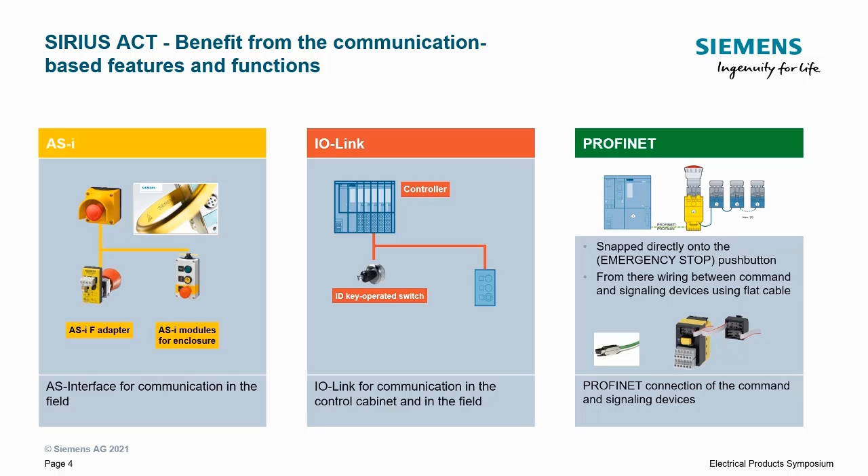So moving on to the communication options that we have available with SIRIUS Act. In addition to standard wiring, we have options for AS-i, IO-Link, and of course Profinet as well. With AS-i, we offer modules that go inside the enclosure. You can order these as standalone items, but these can also be put inside the enclosure, and you can also select them on our SIRIUS Act configuration tool when building up enclosures. We also offer AS-i F adapters on the left hand side that you can see, and then you would put an e-stop onto this with a holder, and that would clip onto the device that you can see.

With IO-Link, we have the modules that go into the enclosure. Again, these can be ordered as a standalone item, but also they can be put inside enclosures, and again they can be selected on the SIRIUS Act configuration tool when you're building up your unique enclosures. We also have a couple of modules over IO-Link for use with the ID key. This is a 4-position RFID key switch, and for each key you choose a different level of access you want that key to have, and it's possible to have a maximum of 50 white keys on this device.

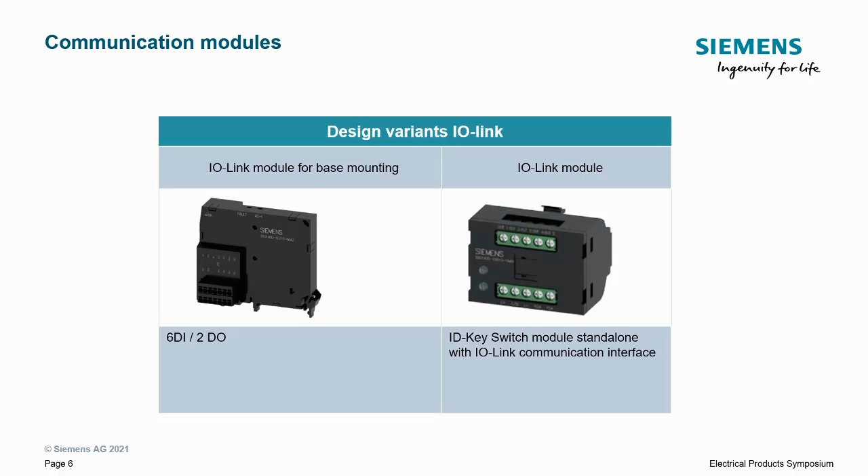So the main topic today is SIRIUS Act with Profinet. So what is SIRIUS Act with Profinet? It's a solution that's a different way of wiring up your commanding and signaling devices. It's a unique innovation from Siemens, enabling you to connect these devices over Profinet and have visibility in TIA Portal. Primarily, it's designed to save time when wiring up your panels and automation stations. It should reduce the chance of mistakes occurring, which can obviously sometimes happen when installing devices using the standard method.

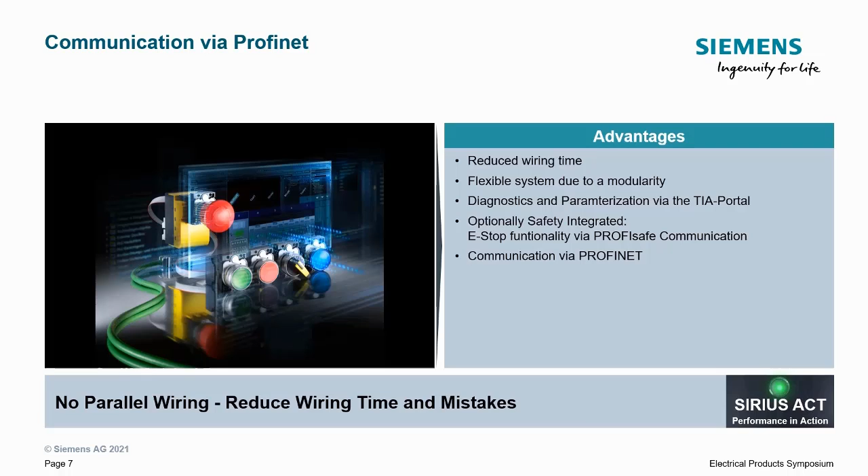And it's integrated into TIA Portal, so you get information back if there are any errors with any of the devices on the setup. And what we're looking at here is how we're moving forward, and how the EP team and the products that we offer are moving into this digital world.

Traditionally, when we talk to a customer about an automation system, normally we see something like we've got here on the left as an example. We see a PLC, it could be a Siemens PLC. We see devices connected directly to the PLC via hardwiring. And then we have some input and output systems. So this could be, for example, a Siemens ET200, connecting all the devices, and these tend to be hardwired, so not over a bus system. So this way the PLC receives the basic information it needs for operating inputs and outputs, etc. But as you can see, the majority of the items are hardwired. With the diagnostics, you'll get some diagnostics information, but it will be from the higher level.

What we are hearing constantly is about Industry 4.0, the cloud, etc. And at today's symposium, we're showing what we have available to help customers move forward with better future-proof solutions, helping the customer make required changes quicker by getting feedback from the whole system, not just certain elements.

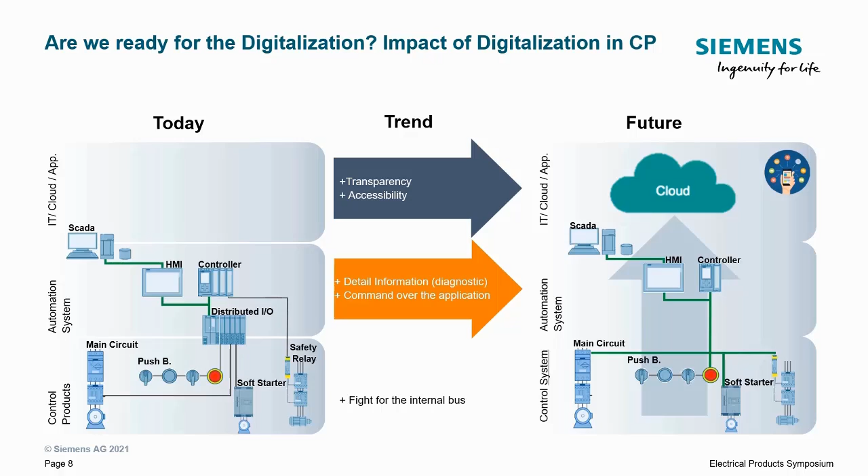So what do we offer for this solution? There are two versions available. We have the standard version and the safety version. Both versions allow you to daisy chain up to 20 additional items from the gateway. The total length between the first and the last items can't exceed 10 meters, and the maximum distance between each module is 1 meter.

The safety version has the functionality of an e-stop and it can achieve a SIL rating of 3. The safety version also requires a fail-safe PLC. For the standard version, you can mount a standard push button on the gateway. Please note that it isn't possible to put an e-stop on the standard version or on any of the terminal modules further down the line.

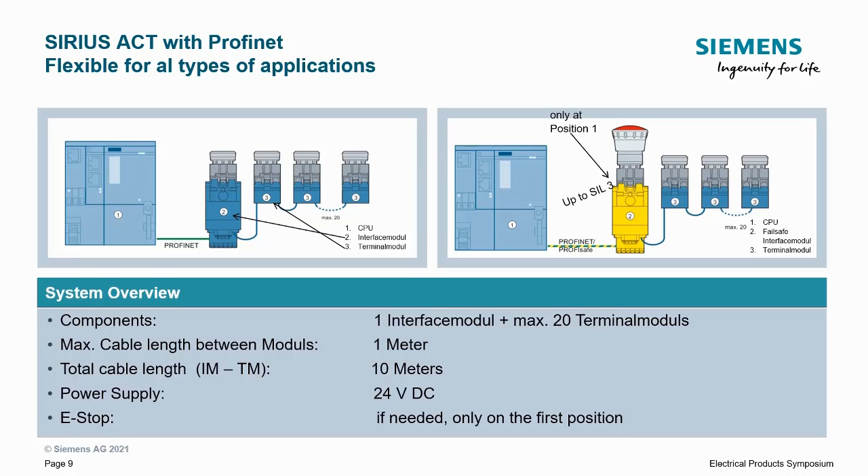When using SIRIUS ACT with Profinet, we're using standard push buttons and standard holders. The only thing that you are changing is the contacts on the back. So instead of using standard contact blocks, we're using either terminal modules or interface modules. As we can see, we have 3 interface modules. So 2 of them are standard versions, and then 1 safety version.

The safety one and one of the standard versions also give you some additional I/O. They have 4 digital inputs, 1 digital output, and 1 analog input. So they are for devices that can't go on the standard terminal modules. So we've got the 4 digital inputs for something like the joystick. We have the analog input for something like the potentiometer, and then the 1 digital output for something like the acoustic sounder or buzzer. The additional I/O also allows you to put some additional sensors close to the interface module. This enables you to send signals to the PLC from the I/O.

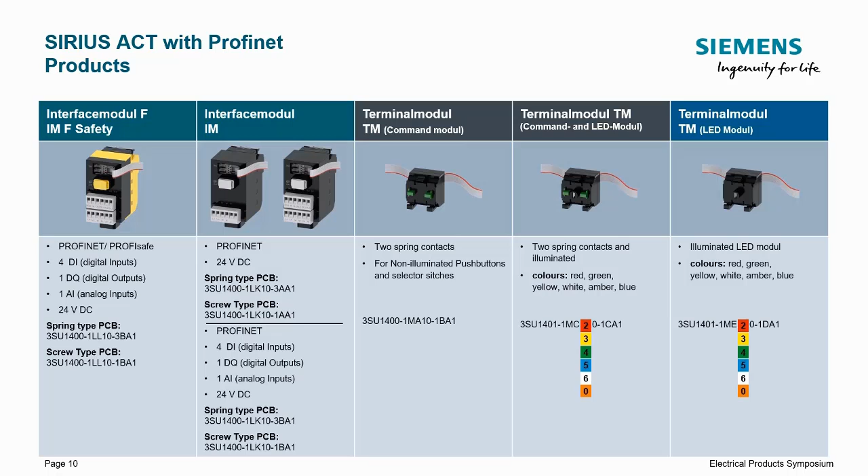So there are 3 terminal modules that we offer. We offer command only, command and LED, with a number of LED colors, and then LED only, again with a number of different colors available. Additionally, we sell a few accessories, including an EEPROM, which you can use on the standard interface modules or as a spare for the safety version.

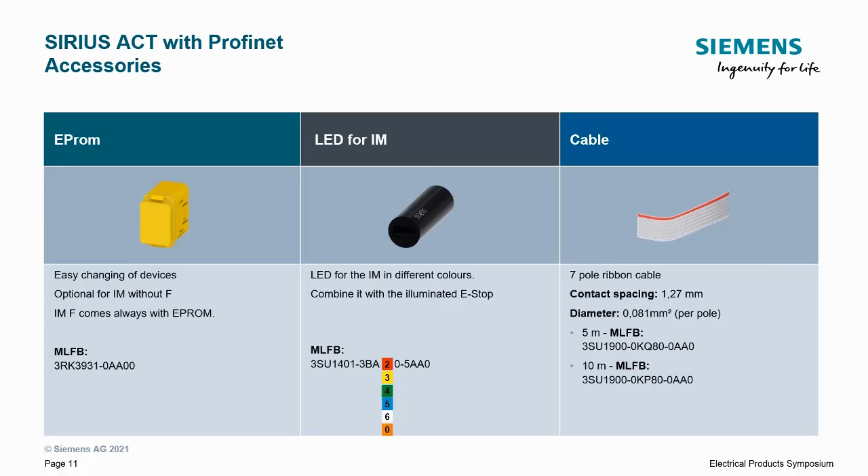There are a number of LEDs for the interface module, so you can illuminate your push button on the standard version or an e-stop on the safety version. And finally, we have ribbon cable, which is used to connect the products. It isn't a standard ribbon cable, it's 7-pole ribbon cable, and we sell it in either 5 or 10 meter length.

Now, what's the key advantage? Again, as I mentioned earlier, this is a new way of installing the standard SIRIUS ACT products. It's simple assembly, it enables you to do this faster than you would by wiring in the conventional manner. There is going to be a lot less wiring, so saving on man hours during install. There are again no special tools required, so you can use a standard screwdriver when installing the commanding and signaling devices, and then a standard pair of scissors to cut the ribbon cable down to the desired length.

You should also reduce the errors that can occur when installing commanding and signaling devices. It's not only standard automation it's suitable for, but also safety systems with PROFIsafe protocol when using the safety version of the gateway with a fail-safe PLC.

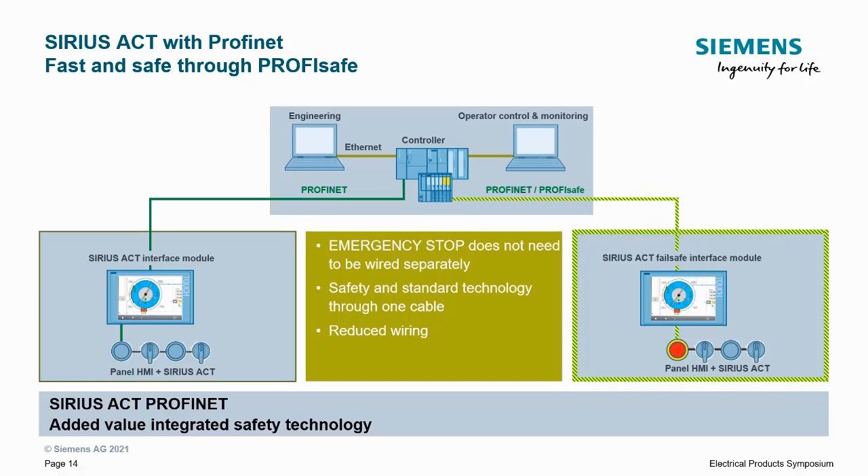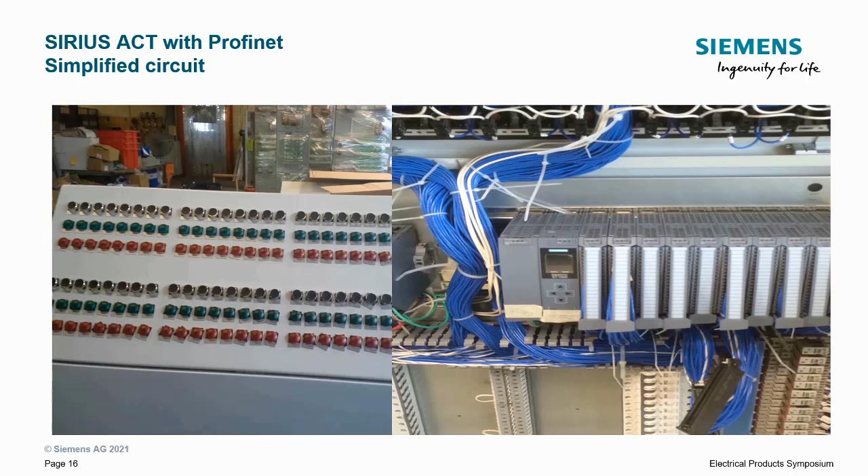What we're looking at here is an example of an extreme setup with countless I/O going to umpteen push buttons at a control panel. Obviously, using SIRIUS ACT with Profinet, the customer would have a much more simplified circuit, and again, as mentioned previously, they're going to be saving on the wiring, saving on the I/O. This simplified setup can also be seen here within the panel. We have a classic install shown on the left and a setup of SIRIUS ACT with Profinet on the right.

It's been calculated here on the mounting time. We're looking at saving around 60% over a classic install with standard contact blocks. All the wiring for the classic install has to go back to the controller, as shown on the previous slide, which isn't the case with the Profinet option. So you can have one Profinet cable going back to the controller.

Also with the classic install, if you have a fault on one of the devices, how would you know that perhaps there is a broken wire or one of the devices wasn't working? You probably wouldn't know until you actually went to push that button.

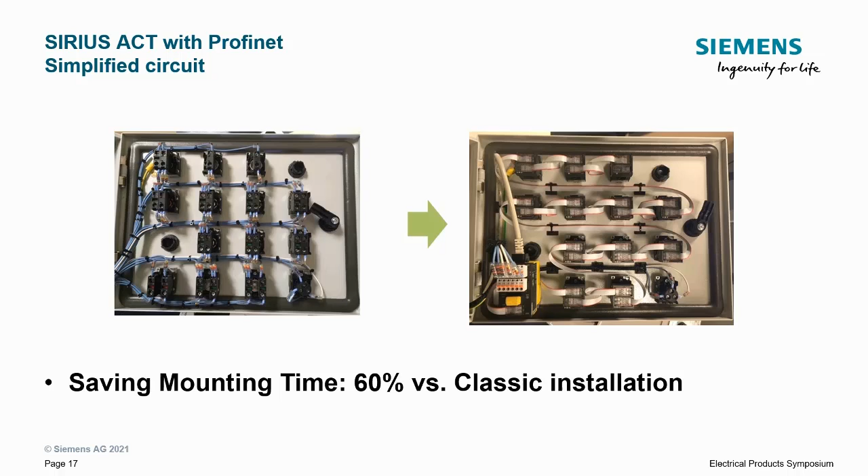With Profinet, with the Profinet gateway, you have online diagnostics all the time. So if any of the terminal modules or anything stops working properly, it will flag within TIA Portal immediately. And the product which has the fault would be instantly recognizable when you opened up the panel, as a red LED would be showing on the back of the terminal modules. So there is no limit to the distance at all.

So 100 meters with electrical wiring with LAN, then another switch, then another 100 meters, then another switch, and so on. You can also go to fiber optic, and you can also go to wireless, and this is an option because obviously we're running this over Profinet.

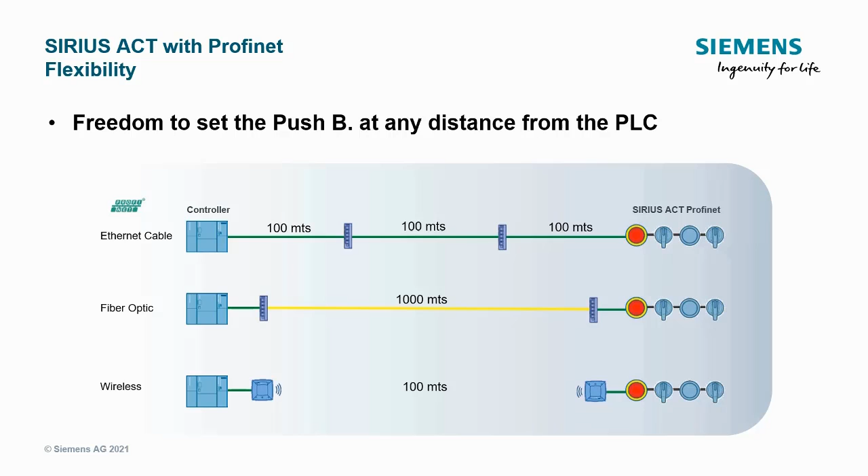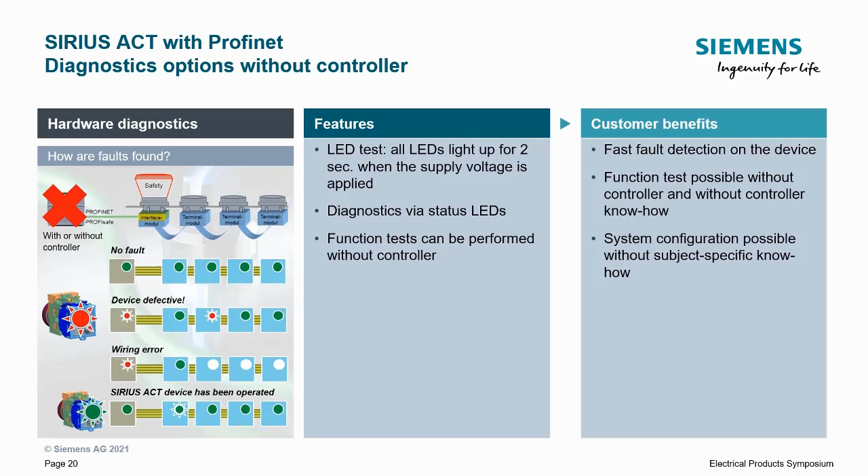It's also possible to test the configuration away from the controller and TIA Portal. On the back of the interface modules and terminal modules there's an LED, and this will go red if there's an error, or green if everything has been installed correctly. The configuration is then stored on the EEPROM, so you can power up the devices by hooking up the 24-volt power supply.

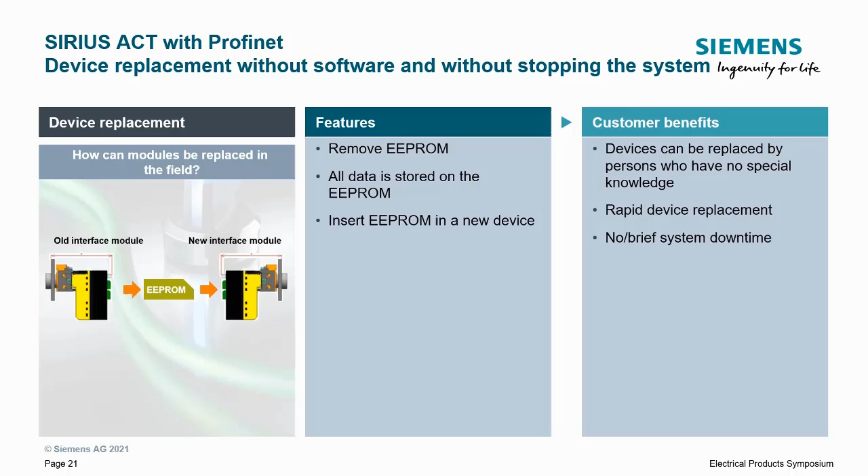The EEPROM on the back of the gateway stores the configuration and enables you to copy that configuration over to numerous identical stations if required. So it would save you time again, as you wouldn't need to repeatedly configure the same setup. You could also swap out the interface module to an identical new device, and it would work with the stored information on the EEPROM from the old device.

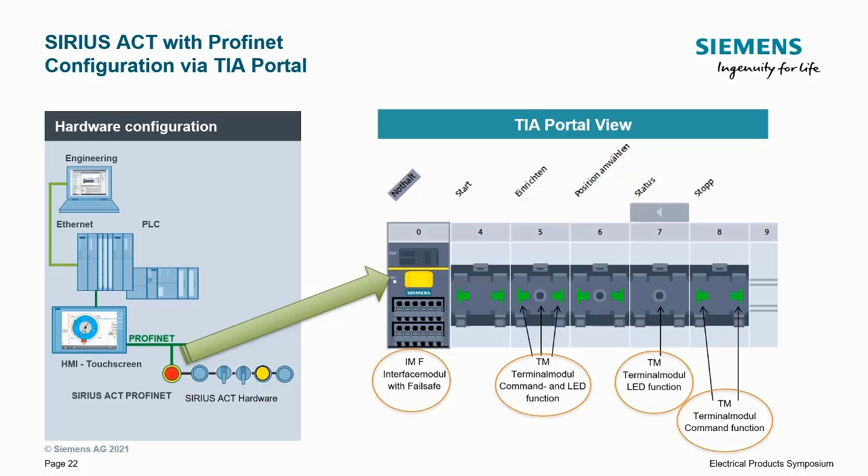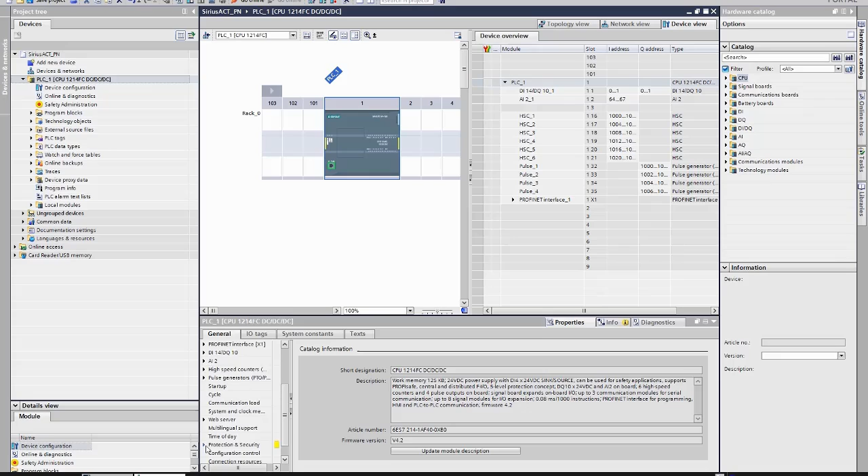I'm now going to switch over to TIA Portal and show how simple it is to configure SIRIUS Act with Profinet. First, add a new device. For this example, we're going to select a SIMATIC S7-1200F. So a safety version of a PLC is required when using the safety Profinet gateway. Then go to Network View, then under Field Devices, Commanding and Signaling Devices, select the interface module you're going to use. We're going to be using the safety version. Drag and drop this, then assign it to the PLC.

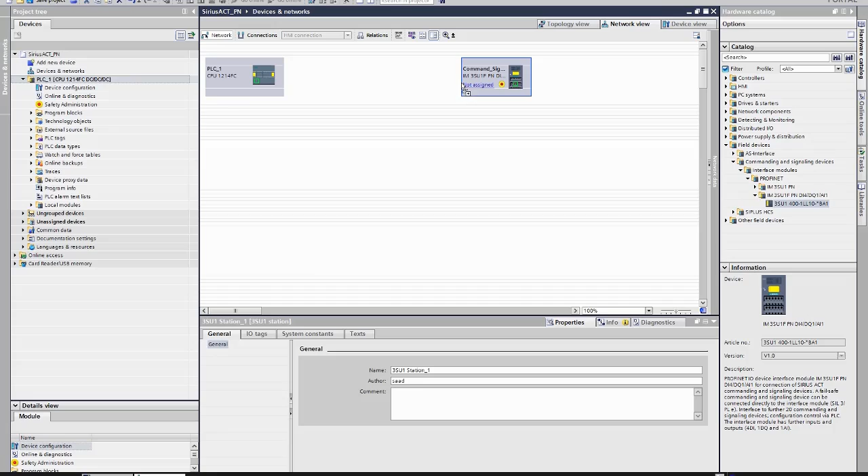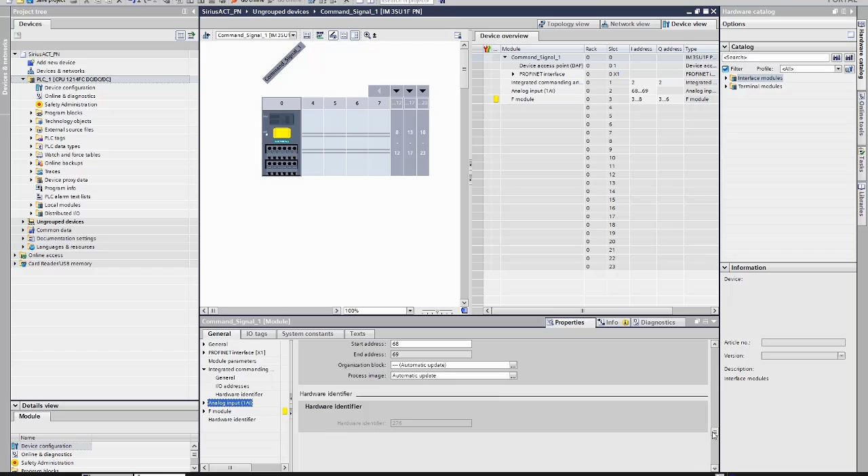Double click to go into the interface module. Here you can build up your system, adding in the required devices. In the safety module, you can see there is general information and details regarding the additional I/O. So we will now add in the next device to the system. There are 3 terminal modules available: command only, LED only, and command and LED.

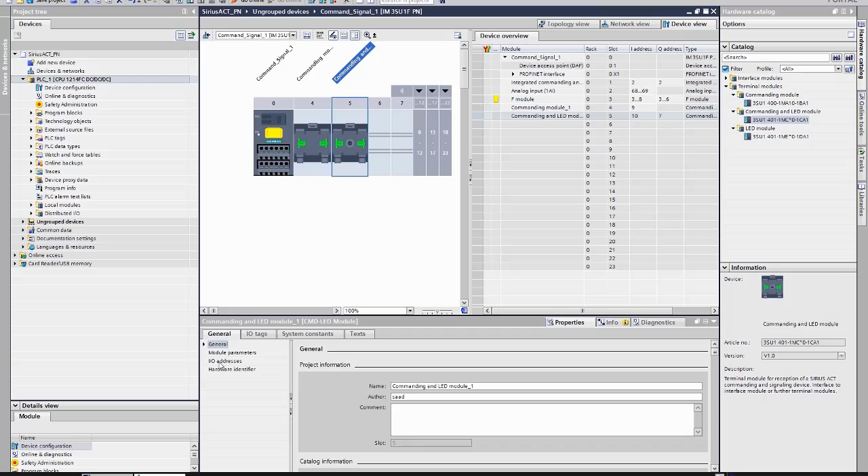Double click, and for this example we're going to be first adding in a command only device, next command and LED. With this you can also alter the brightness of the LED, 100%, 75%, 50% or 25%. You can also set it to blink if you want. These are additional functions only available by SIRIUS Act with Profinet.

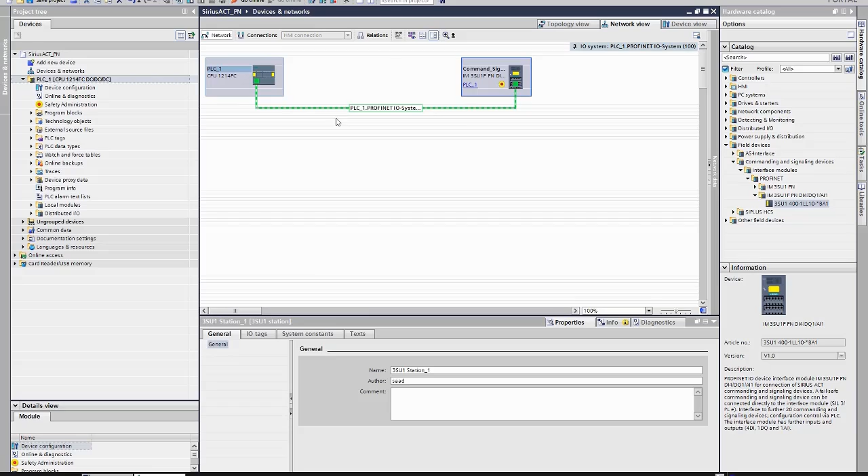Once complete, go to Network View, compile the configuration, which just takes a moment. Then assign the device name, close and save the project. It's similar steps that you need to go through if you're going to configure a SIMOCODE or soft starter to make communication, so you may already be familiar with this process. This shows you just how easy it is to configure this within TIA Portal.